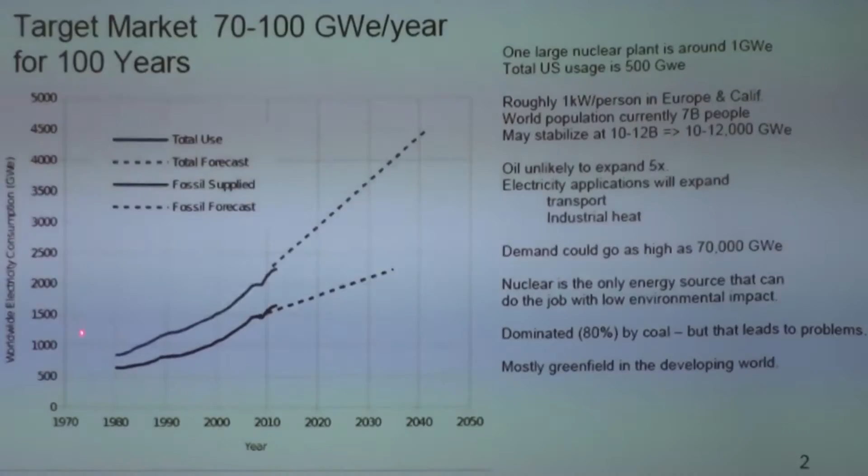Here, this is gigawatts electric. So one large nuclear power plant is roughly a unit of 1. So this is roughly equivalent to how many large nuclear power plants do we need? In Europe and the US, we use about 1 kilowatt per person. In Europe and California. US is a bit higher as a whole. Reasonable efficiency gains, we should be thinking along the lines of 1 kilowatt per person.

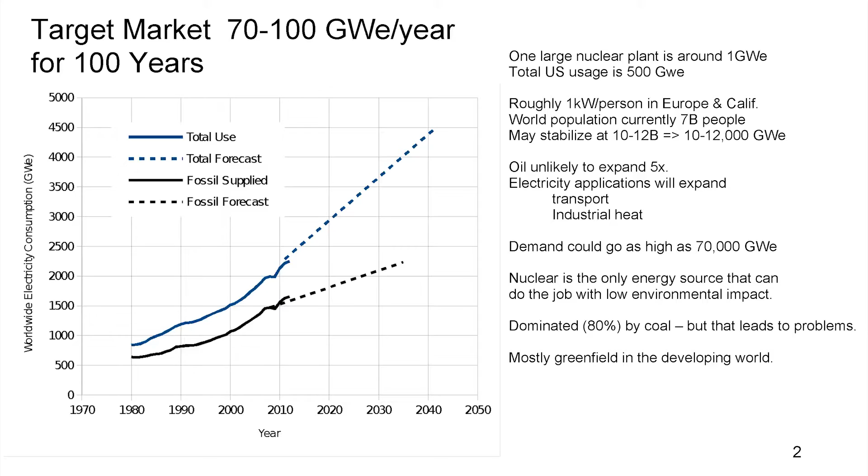Our current population is 7 billion. It's probably going to grow to in the neighborhood of 10 billion before the economies grow big enough that population stabilizes. So we're looking at a market of about 10,000 gigawatts electric. But it could be larger because while we may not be in peak oil, we keep looking harder, we keep finding more, but I don't think anybody honestly expects we're going to find 5 times as much oil as we have.

So transport is going to shift. Likely it's going to shift towards electricity. That's going to drive up our demand and how much total generation we need. Similarly with industrial heat. So there's a lot of reasons to suspect that 10,000 gigawatts is still a pretty low ball estimate, and we might be looking at maybe as high as 70,000 gigawatts electric. This is a huge, huge market, the size of the whole oil industry today.

If you look around to say what could possibly supply this kind of energy, nuclear is the answer. The others simply can't meet that demand. But if we don't change the price of nuclear, we're going to be dominated by coal. And you're going to see 10 times as much coal as we have today. That's what's going to happen unless we can create a nuclear that's cheaper.

The good news, though, is that most of this nuclear is going into greenfield deployments. It's going to people in the world that don't have electricity yet. So we've got kind of a level playing field of brand new coal versus brand new nuclear. That's a lot easier battle to win than an existing coal plant and I want you to shut it down, I'm going to replace it with a nuclear plant. That's a hard economic argument to win.

To successfully compete against coal, we need something that can scale up to a very high volume, on the order of 100 gigawatt per year installation. Not 2 or 3, but around 100 gigawatts per year, or you're not seriously competing with coal. That sounds scary. I mean, it's a lot bigger than we've known how to do so far, but this is roughly what we're doing for wide-body aircraft. Between Boeing and Airbus, they've already produced 100 wide-body airplanes this year. So it's on that kind of manufacturing scale. It's not really out of sight.

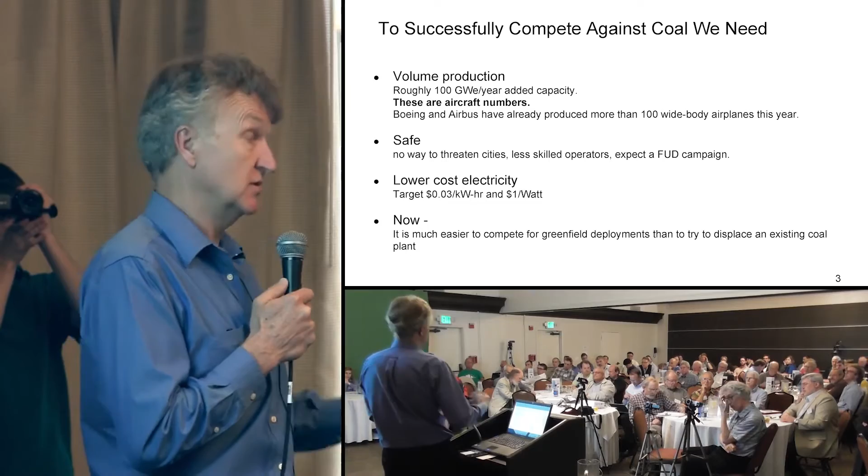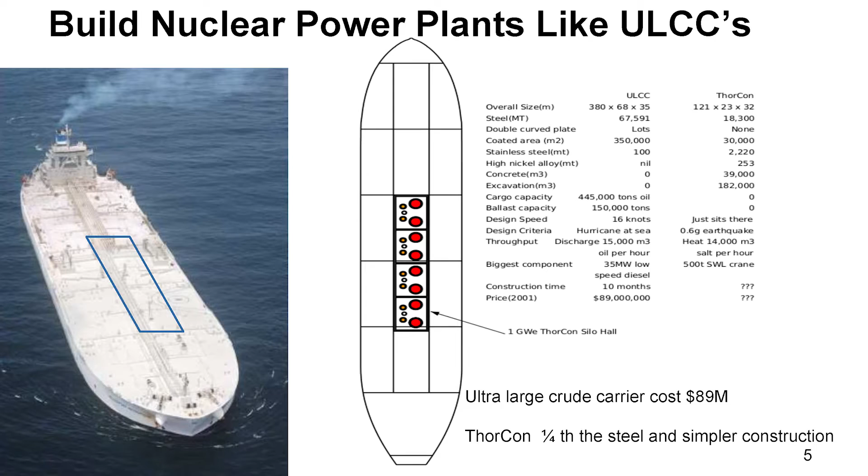So to go into more detail on the volume production end, this picture is a picture of an ultra-large crude carrier. It's one of the world's largest ships. It was actually designed and built by the founder of our company. This blue box here is a 1 gigawatt power plant, drawn so that you can see it head on. This is a 1 gigawatt nuclear island of a power plant, not the turbines and the generators and the cooling towers and stuff, but the nuclear island.

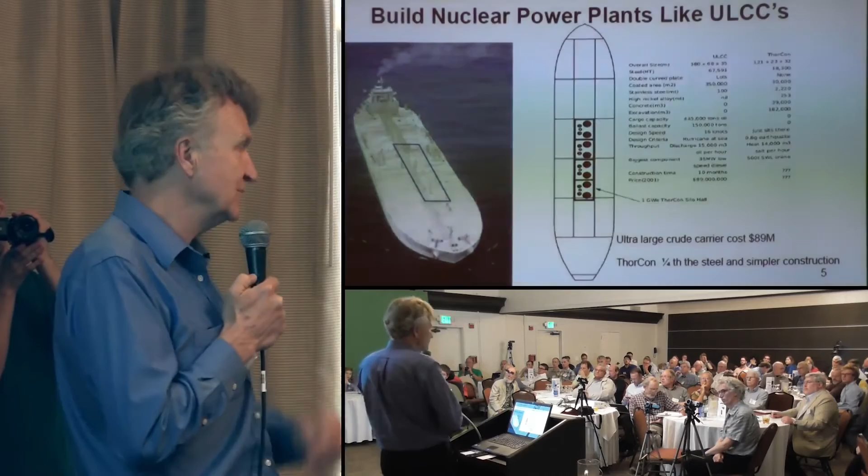And it's small compared to the boat. It's like 1/4 of the steel. And similarly for virtually all the other numbers here, which are too much to go through. But it's simpler to build and 1/4 the steel. This boat cost $90 million. So if I can build a 1 gigawatt power plant for anything remotely resembling how much it cost us to build that ship, then we're doing very much better than with current technology.

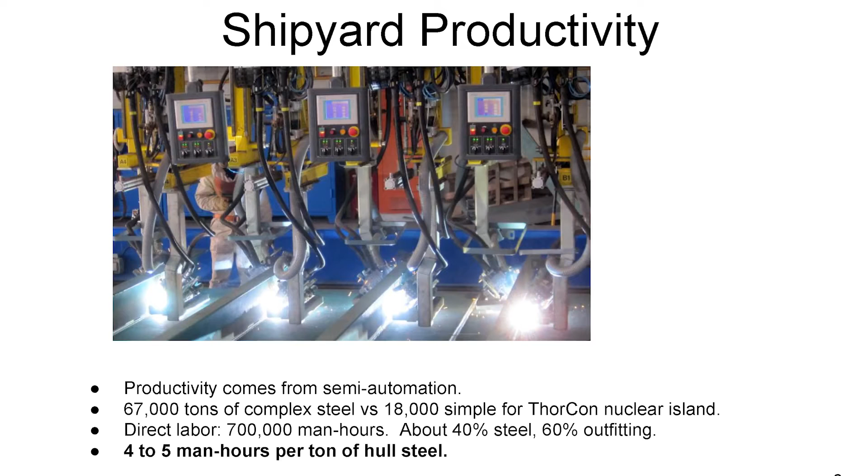The reason that it costs so little for that boat compared to how big it is, is that they have shipyards that run things in production. This is for a double-hulled ship. You've got a plate of steel on the bottom, you've got ribs going across here, you've got robot welders that are welding the ribs to the plate of steel, and you've got one person there running 5 or 6 different machines simultaneously. And then they flip it over and they do the other side, so you make this double-hulled construction.

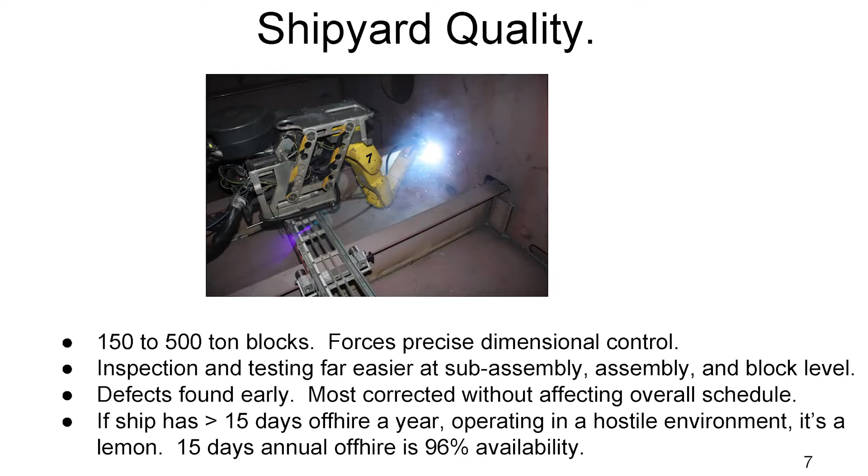We're building the power plants using the same basic technology, actually in the same yards. So our power plant basically is a boat dug into the ground with double-hull steel and concrete poured between the steel. One nice effect of that is that you get very high quality control. You get a lot more uniformity, a lot tighter quality control.

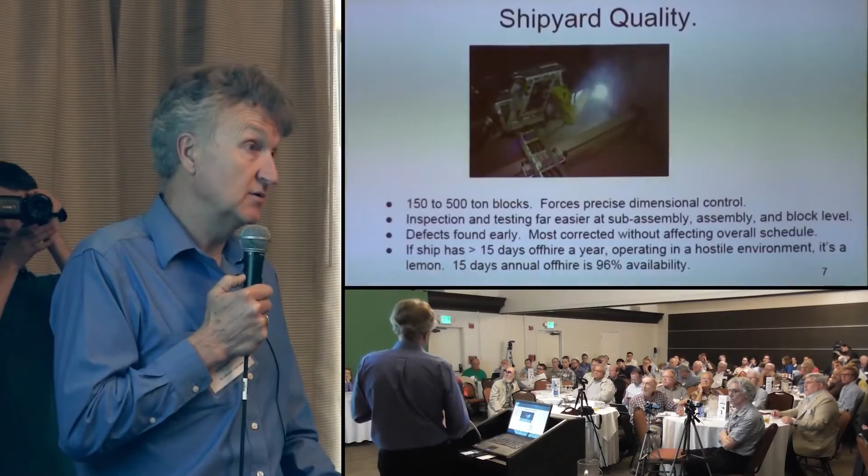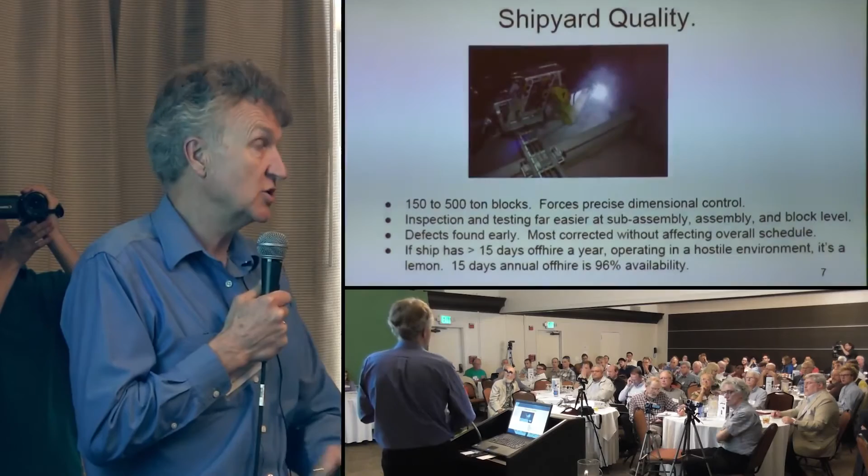We do these in blocks that are 150 to 500 tons, and the blocks have to align in the field very precisely, and then they're welded together. We do the measurements, and they're quite accurate on those measurements. They have to compensate for how much 2-inch thick steel sags when it's set on end. We can do the full inspection on the production line, and if there's any defects, you can reject the block, do the modifications on the production line. You don't have to do this work in the field.

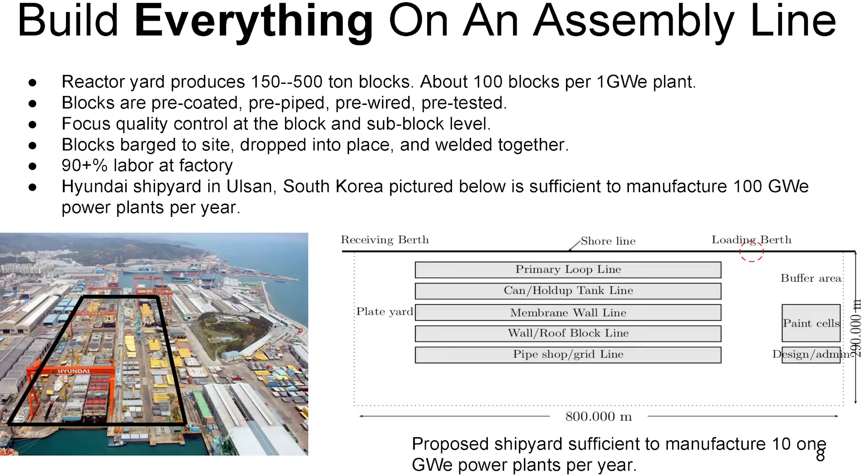So our goal is to get like 90% of the work done at the production line and leave only 10% for the field. A 1 gigawatt power plant is about 100 of these blocks. So they're pre-coated, pre-piped, pre-wired, everything is all finished in them, and they're ready to basically plug like Lego blocks to the adjacent blocks. Once the blocks are all ready, in a normal ship, they would be built in the dry dock at the shipyard. In our case, we're going to put them on a barge and carry them out to the nuclear power plant site.

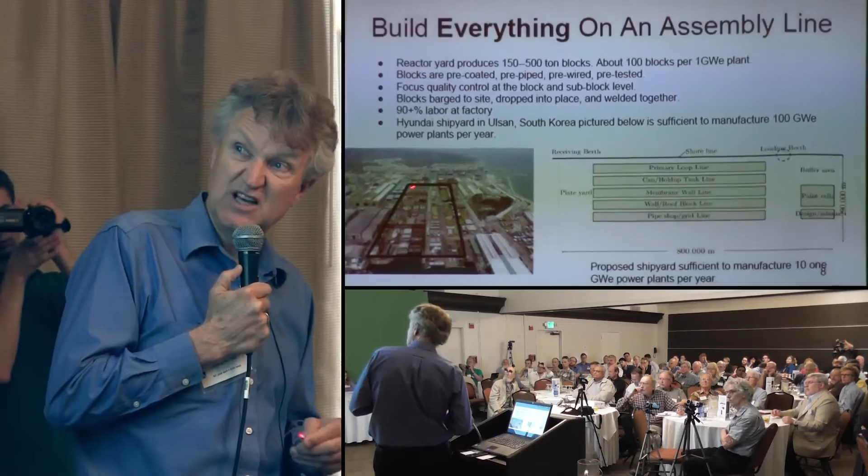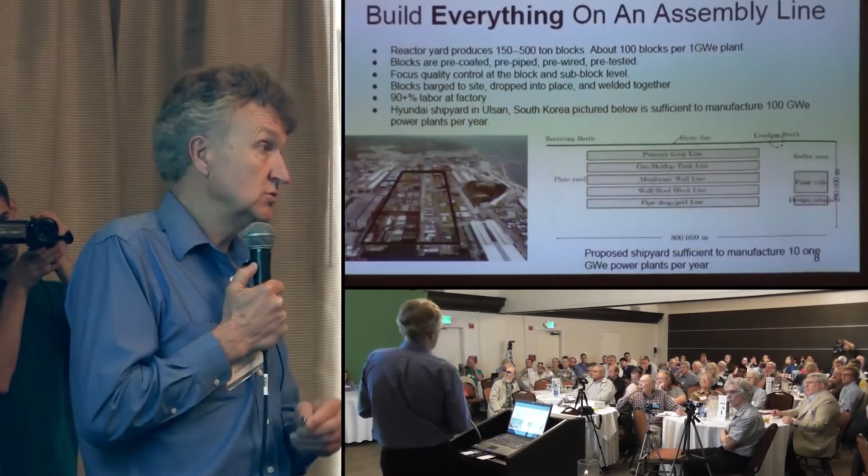This picture here is of a shipyard in Korea, run by Hyundai. This is actually the world's largest shipyard. The highlighted area is the area we would need to build a 10 gigawatt per year power plant factory. And this gives you actual dimensions on it. If we took up this whole shipyard, we would be able to produce 100 gigawatts per year. So the concept of being able to build power plants at 100 gigawatts per year is very, very much viable.

And once we get away from the thick forgings of the reactor vessel that you have with light water reactors, the block size is limited by the transport. We would love to build the whole power plant in one big block. It gets to be a little awkward to carry around.

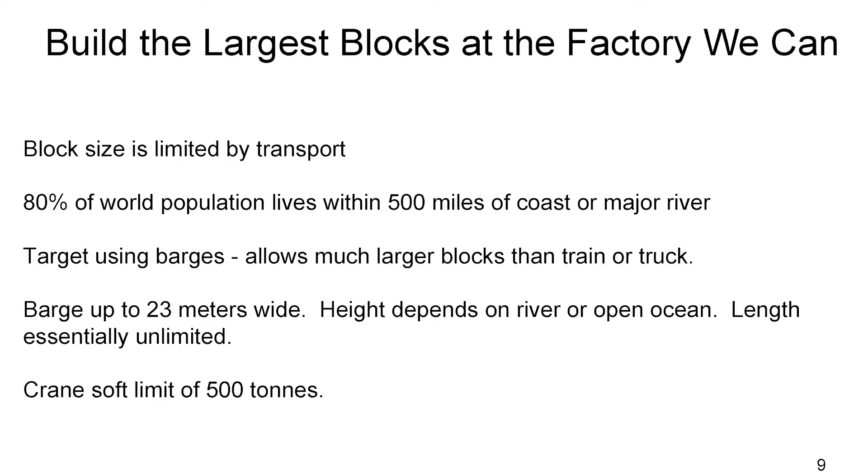What we notice is that about 80% of the world's population lives within 500 miles of a coast or a major river. So we're planning to use barges for our transport, which makes it so that we can transport these 500-ton blocks. They can be much larger than you can fit on a truck or a train. And that makes it so that we can do more of the work at the factory, do more of the inspections at the factory. So the barges are up to 23 meters wide. That's set by a lot of the rivers and the locks in the river systems.

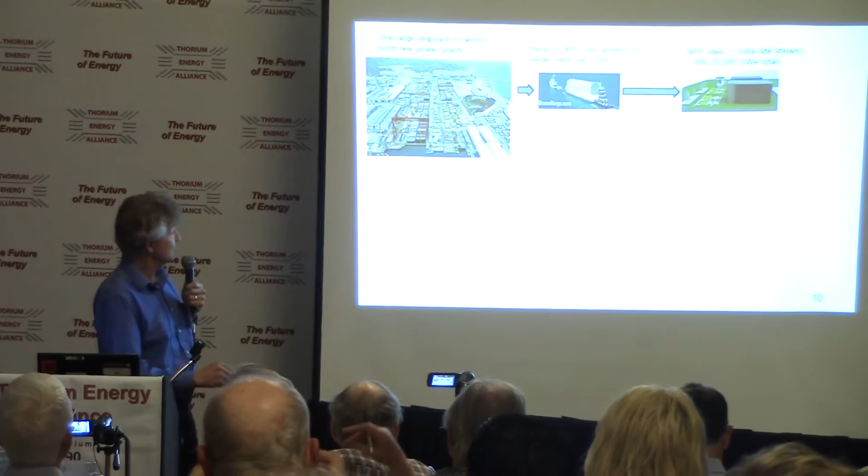500 tons is our current design limit, but that's set by crane sizes, and there are larger cranes, so we're going to be doing some economic trade-offs of whether we should go to larger blocks still or not. So the concept is you have a factory that puts things onto a barge. Takes us about 20 barge loads to deploy a 1 gigawatt power plant, so that's what this is.

And once you've done that, then every 4 years we exchange our cans, because we have a graphite moderated reactor, and so the graphite is going to get neutron damaged. We have to replace it. And we do that by having sealed cans that we put on a can ship, we call it, a specially designed ship, that will haul those back to a can recycling center, which basically looks like another shipyard that services about 50 gigawatts electric.

And we take the cans in, clean them, inspect them, make sure they're still good to go, ship them back out, or in some cases, like with the graphite, we take the old out and put the new in. After we've been doing that for a decade or so, we're going to have some spent fuel, and that will go to a fuel recycling center.

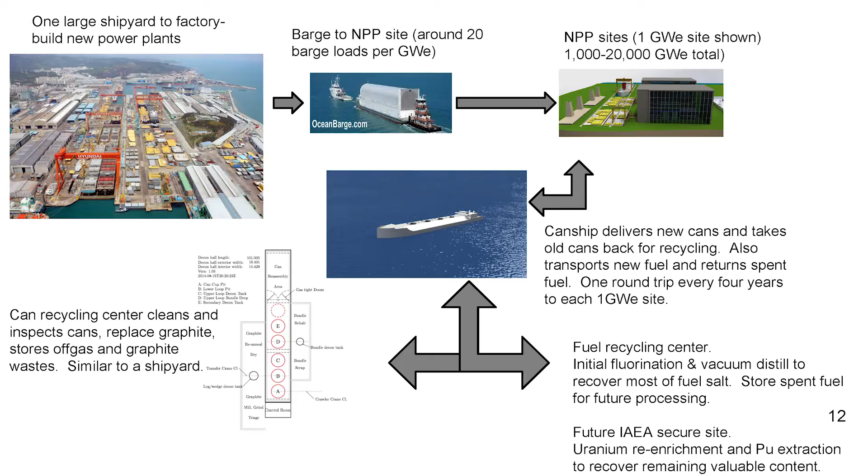We'll start out with just using simple fluorination and distillation to recover most of the salt. That'll let us recover the salt and the uranium and the thorium. It does not let us recover the transuranics. In the future, we would anticipate making this a secure site and being able to do re-enrichment and to do the transuranic extractions. Power plants are quite content to eat all of their own transuranics, so that our waste flow as far as the plutonium and curium and americium is set by how much leaks through your chemical extraction process.

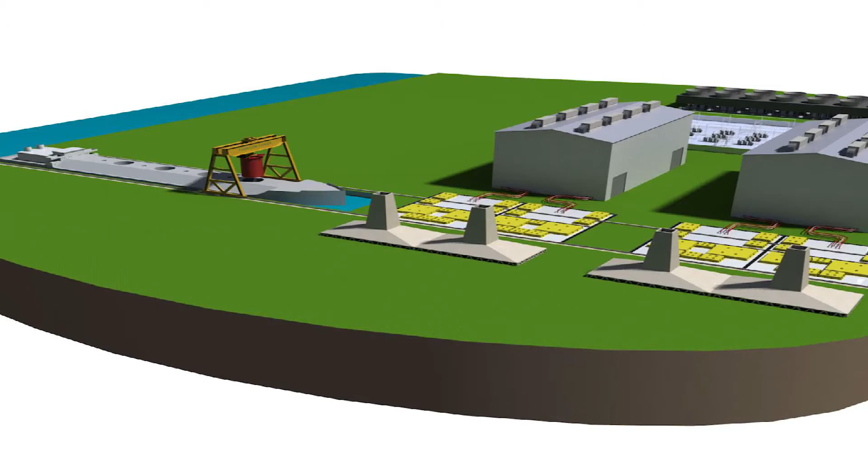We have to be safe. This is a 1 gigawatt power plant site. You see the can ship here. You see this little red one is a can. That's a 250 megawatt electric reactor. We have a crane that moves along on rails, so a gantry crane that picks it up and takes it over. These yellow hatches here are the doors to our reactor. So our reactor is completely underground, and you access it directly from above. So you take off the trap door, and then you lower the reactor down into it.

These closed towers here are the decay heat cooling towers. So we have fully passive decay heat removal. And then this is a standard turbine generator. We use standard steam cycle turbine generators until other people spend the money to invent the Brayton cycles. We have no objection to Brayton cycle, but we don't want to wait. I can buy the steam cycles today, and I want now. Then behind that is a switchyard and forced draft cooling. But I'm sure we're going to end up having to support several different cooling styles depending on the site.

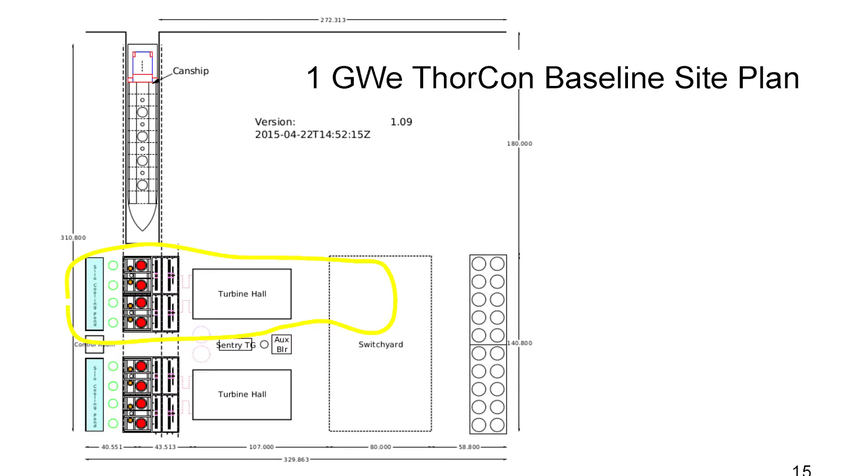So this just gives you some of the dimensions in meters of the different areas. Optimum turbine generator set is about a 600 megawatt turbine generator. They make them larger, but they don't get any cheaper per megawatt, so we get better modularity by going about 600. They make them smaller, but they get more expensive. So we're sticking around the 600 megawatt. We have 250 megawatt blocks, so it takes 2 of those to drive it, and these little red lines here are the steam lines that are going off to the turbine generator building.

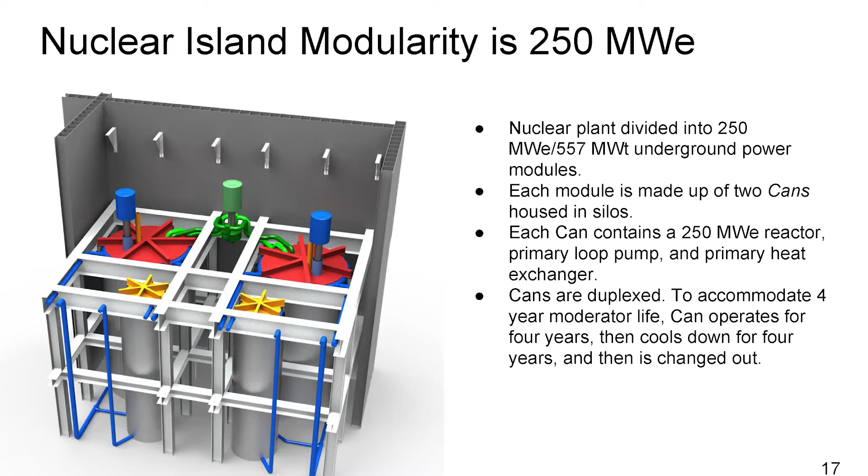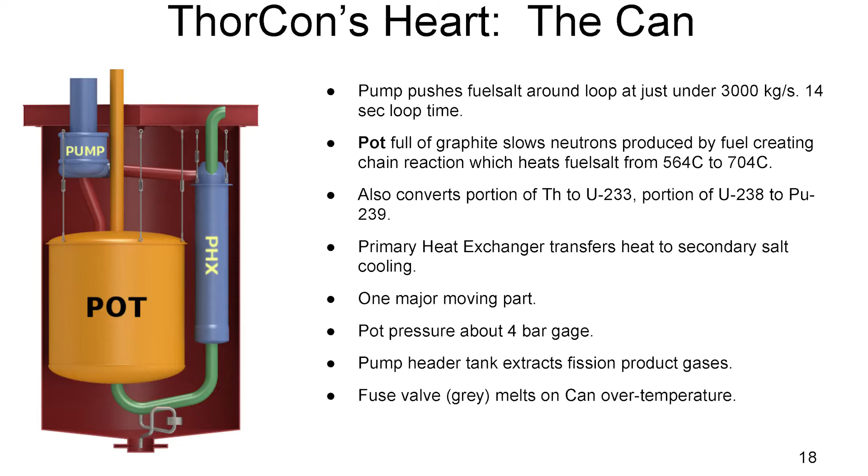The nuclear island itself is 250 megawatts. We have 2 cans, so we're duplexed. So one can is operating while the other can has spent fuel in it and is cooling down, letting things cool down before we transport it over the ocean. So what we're transporting is on the order of 4 years old. Okay, each can contains the primary loop pump, the primary heat exchanger, and the reactor vessel itself. And so all of our radioactivity is really contained within the can. We ship a sealed can out, we take a sealed can back.

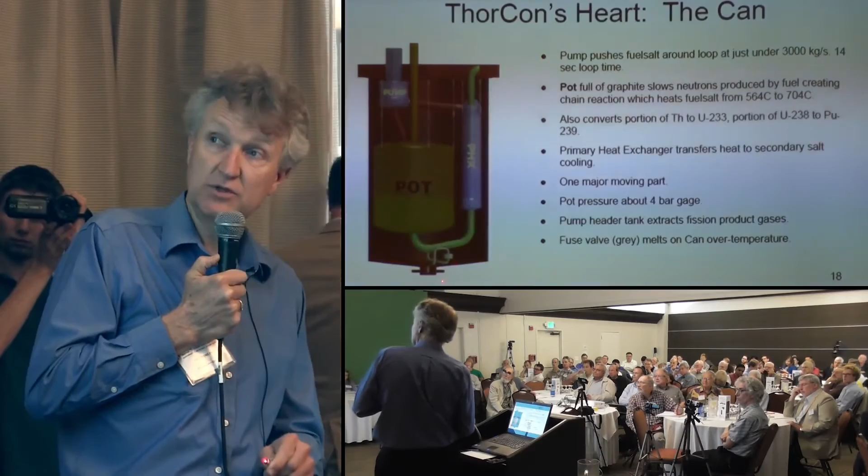Inside the can, you've got the reactor vessel called the pot. We've got the pump and the primary heat exchanger, and those go around in a loop. You get secondary salt coming in and going out. And we have the fuse valve here at the bottom. And this will go off to a fuel dump tank, which we'll talk about in a minute.

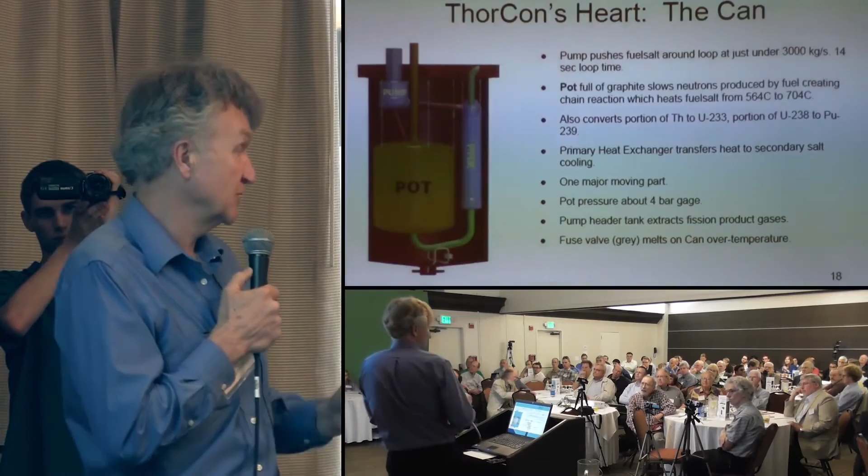Everything is hung from the ceiling of the can to accommodate thermal expansion. That turns out to be a reasonably challenging engineering problem - how do you deal with how things change shape as they go from room temperature up to 700 C? So we've done that by hanging everything from the roof and letting the cables adjust to let the parts move apart from each other and squeeze together with temperature.

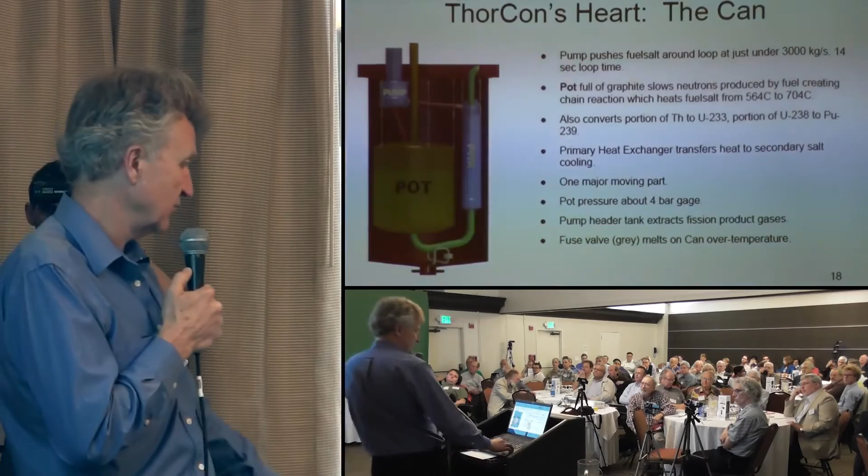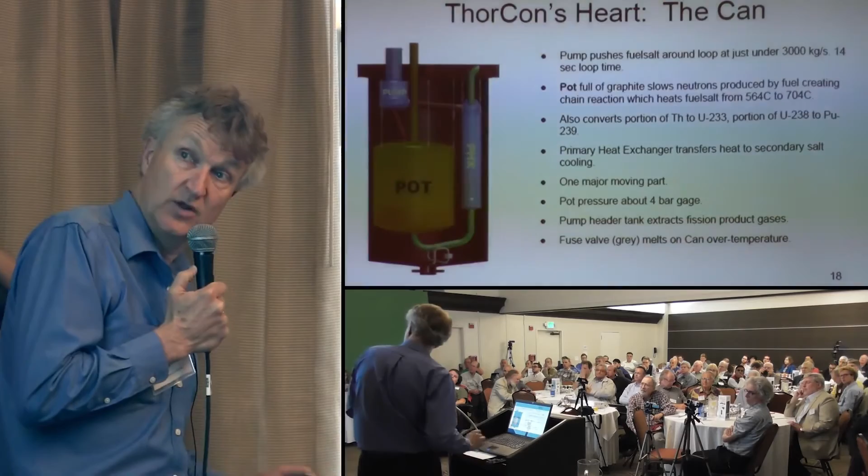The pump is moving about 1 cubic meter, about 3,000 kilograms per second, and it's about 14 seconds to go around the loop. You only have one major moving part, that's the impeller for the pump, and the pressure is modest. The pot itself is around 4 atmospheres. The highest pressure in the loop is 12 atmospheres. So we're dealing with very modest pressures here.

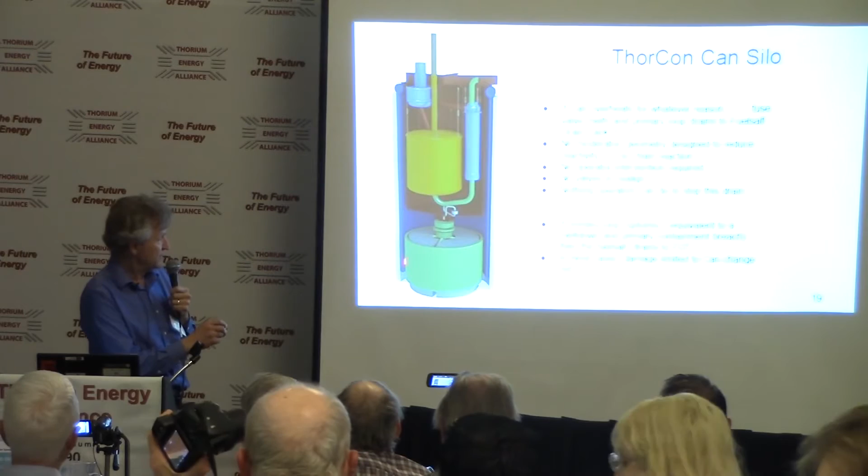At the bottom, below the can, we have what we call a fuel dump tank - that's just the green part. It's a donut-shaped vessel that will hold all the fuel salt. Because it's donut-shaped, it's very poor for neutronics. Because we can move the fuel, we move it there, and it's in exactly the wrong shape for good neutronics.

So the reactivity down there is very low, and if gravity works, anything that overheats will cause something to melt - preferably the fuse valve, but if that fails, then a pipe will melt, and the fuel salt will fall down into this donut where it is not going to fission. Guaranteed. No chance, no discussion about possible re-criticality. That just isn't possible to happen.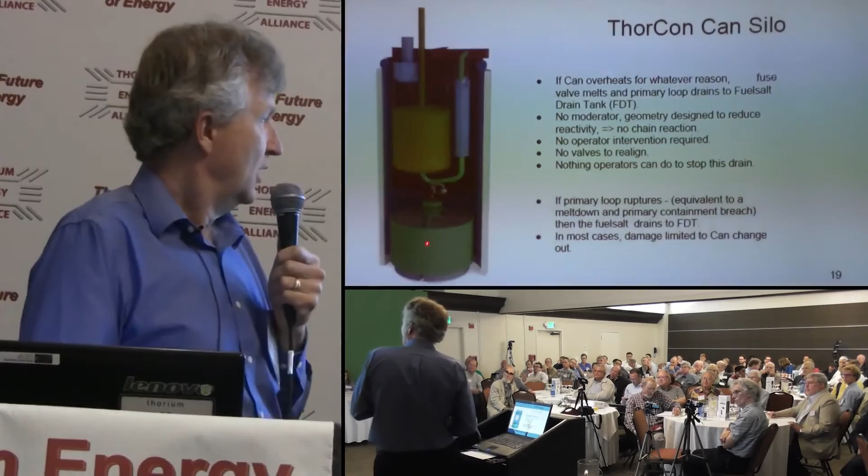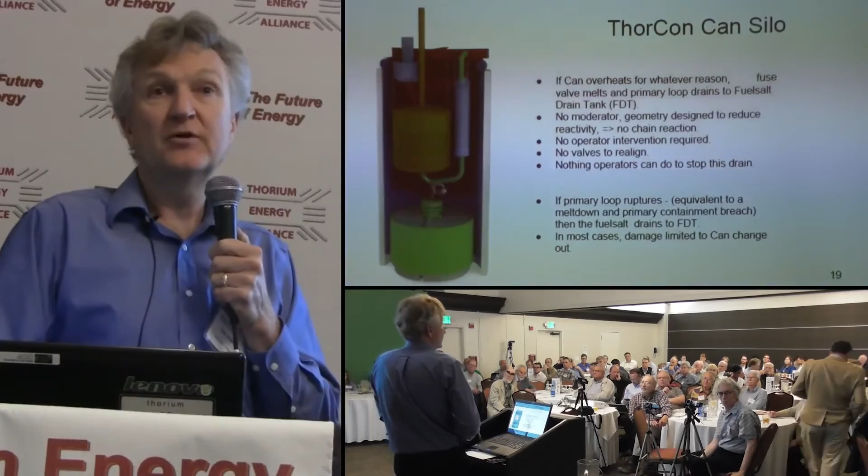I should say also that the fuse valve and the emergency drain here is something the operator can't prevent. If the Prime Minister calls and says no, you're not allowed to open the valve, the operator just says, I can't stop it. There's no valve he can possibly fail to open. There's no valve he can accidentally leave closed and cause trouble with, like we had with Three Mile Island. So the safety here is not operator dependent or Prime Minister dependent.

The next safety feature is what we call the membrane wall. These are vertical pipes, this dark blue here, that surround the can and the fuel dump tank, and they're filled with water. Heat radiates from the can to the pipes. If the pipe gets over 100 degrees C, it changes to steam, and that wants to float. That creates a natural circulation - it's a very strong pump. So we have radiation going from here to there that will keep the can temperature at around 270 C.

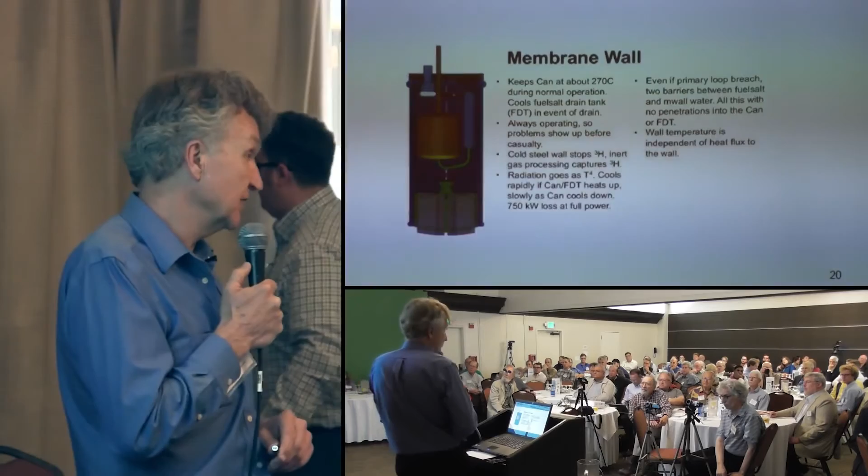Likewise, if you get down to the fuel dump tank, if we have heat generated down here, then it'll pump up from here. So the decay heat removal is there all the time - it's operating all the time. If something should happen, if some earthquake squeezed a pipe or something that blocked it, we will know because we see it in the flow during normal operation. We don't have to wait for the tsunami to hit to discover we have a problem. So we have it continuously being tested, continuously running, and the operator has no valve, nothing he can do to stop it.

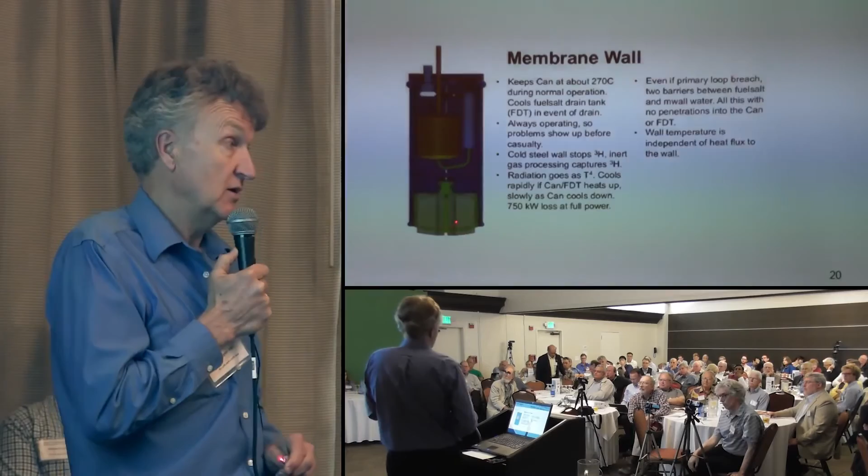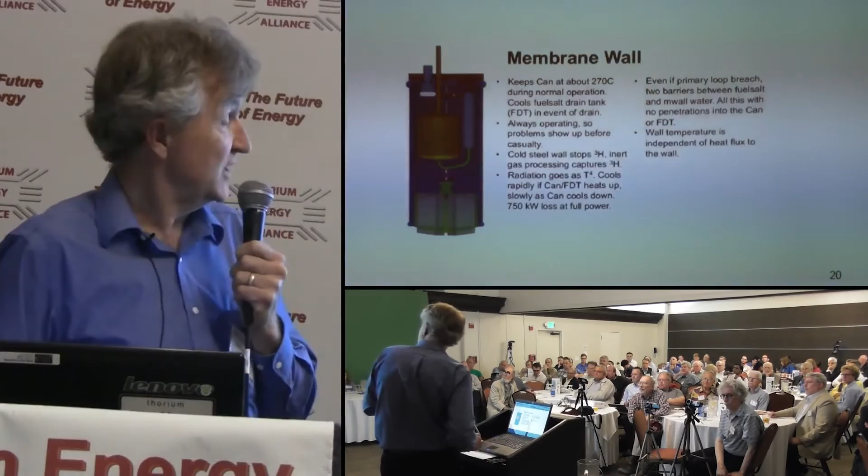It also doesn't penetrate any of the radioactivity area, so this is done purely by radiation - no bayonets or anything probing down into the fuel dump tank. We've tested this in software up to 30 megawatts of decay heat power, and the peak decay heat we actually see is 5 megawatts, so we have a lot of margin on that.

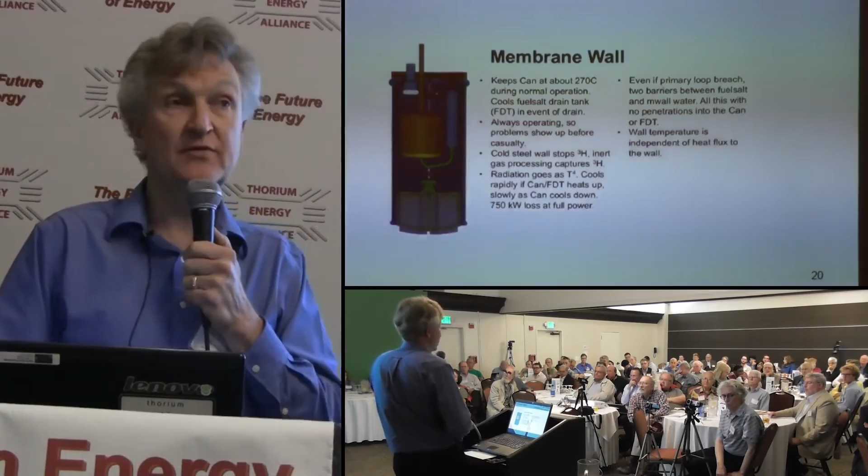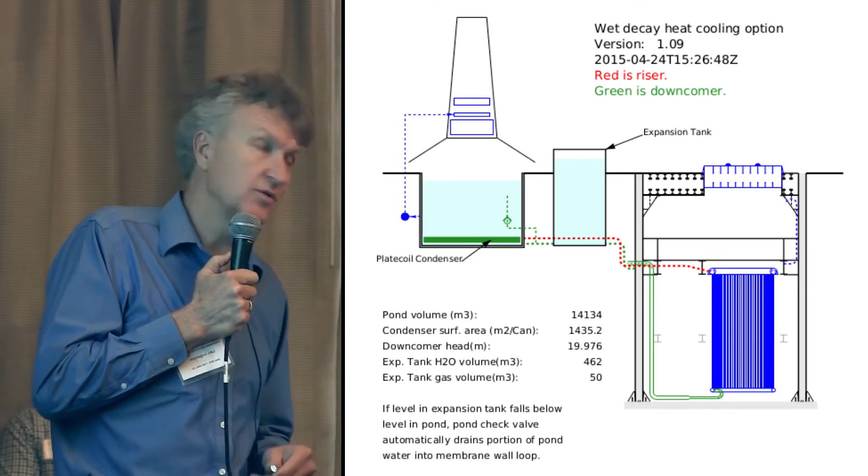If for some reason you're not allowed to put a chimney up, then it's still 72 days worth. So we have plenty of decay heat removal, and this is atmospheric pressure water, so it's very easy to replenish the water if you have any need to.

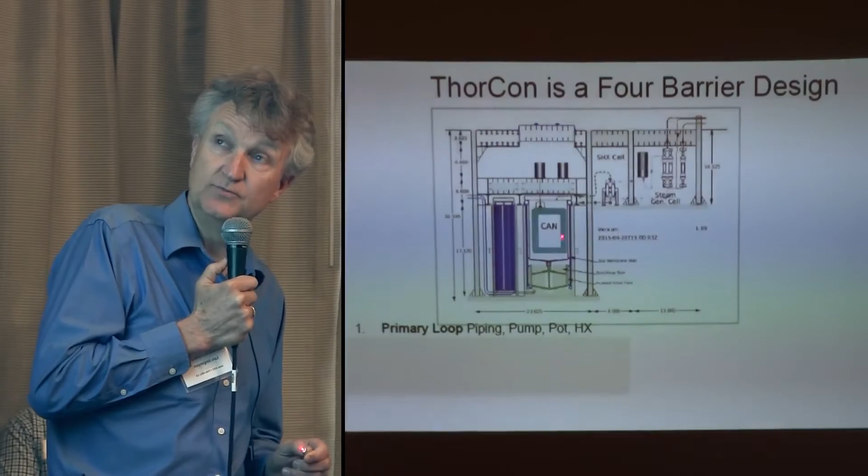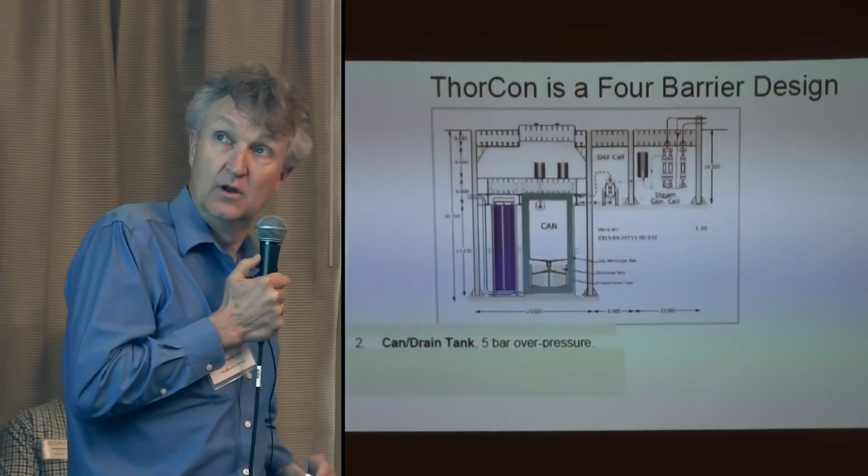Besides decay removal, we have multiple barriers to removal of the radiation. The radiation is inside a primary loop, the pump, the pot, the pipe. So it's inside here. That is all inside of the can and the fuel drain tank. So that's the second barrier.

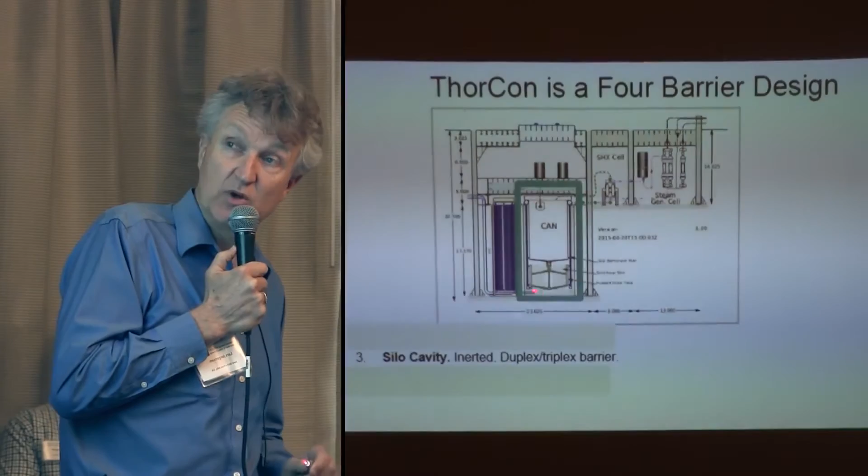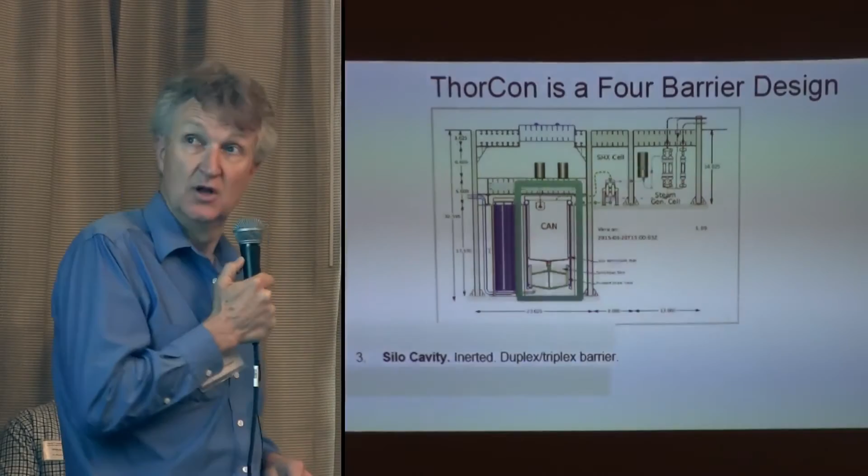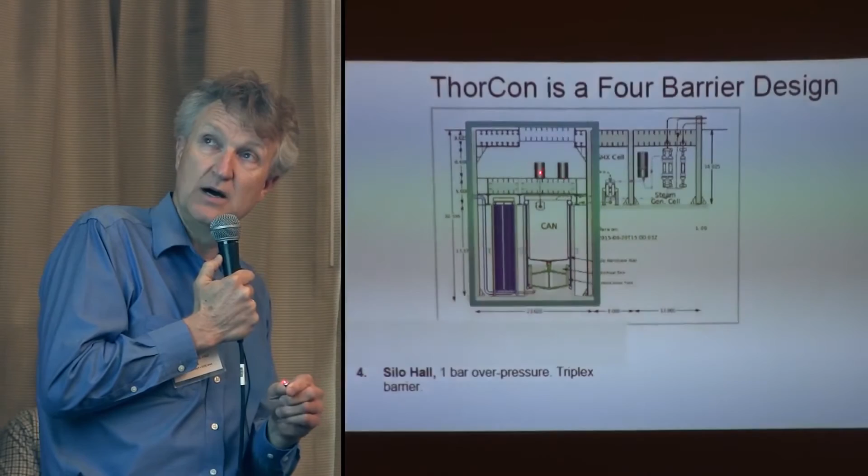The can and drain tank is in something we call a silo, which is a concrete structure, basically a concrete steel cylinder that's also gas tight. And then that whole thing is inside of what we call the silo hall, which includes the motors and the hatch to the outside world. So this is where you finally get to the outside world, and this is all ground underneath.

So we have 4 barriers to getting any kind of radioactive release, and at least 1 barrier between adjacent modules. So if you did have one module that goes out, it's very unlikely to contaminate the adjacent modules.

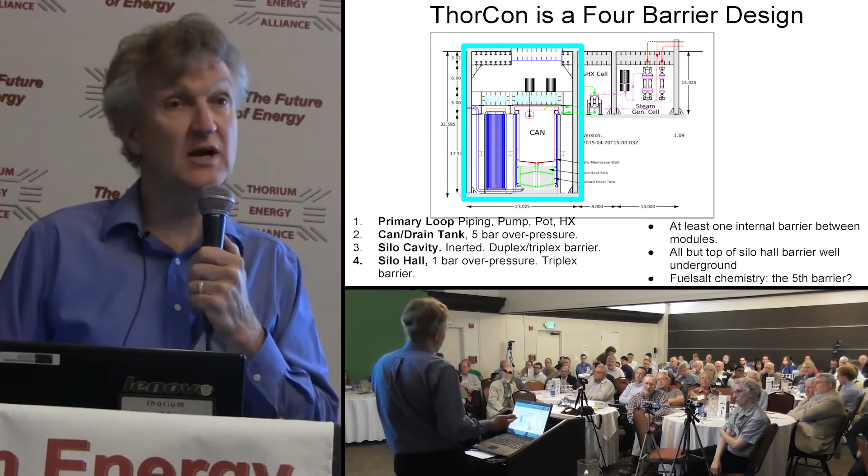We actually, in many ways, have a 5th barrier in that the fluoride salt itself is a very good barrier, in that the dangerous nuclides or elements would be your cesium, your strontium, and your iodine. And the cesium and strontium form pretty tight fluorides that don't want to go anywhere. In fact, figuring out how to get the strontium out is a fair challenge. It doesn't even boil until like 2500 C or something ridiculous.

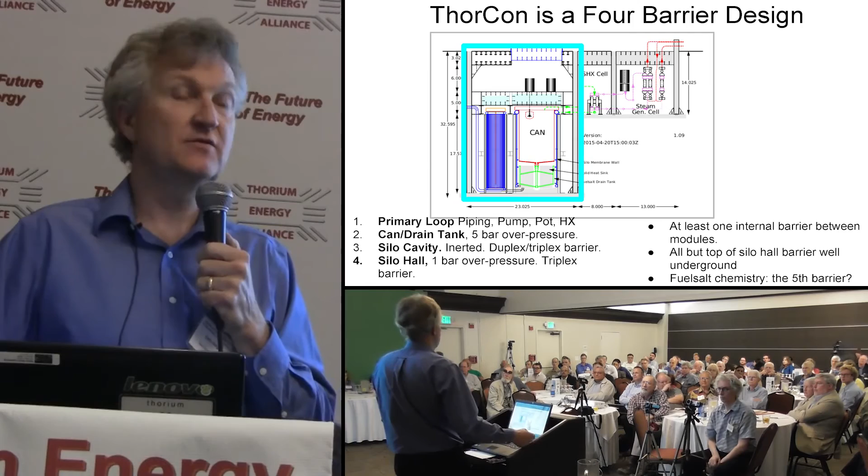So even if somebody sent, say, a bunker buster missile in and went blasting through all of the barriers, you create a spill—it's a spilled salt that solidifies on the floor. It's not something that wants to go into the atmosphere in the first place.

Just a quick word on the neutronics. I'll keep this real short. The core is made up of logs.

The logs are made up of planks, and all of that is graphite. If you're familiar with the Ebasco design, that was a spin-off from MSRE when they were looking at MSBR—it's based on that. We've made an accurate 3D model of the pot and run that both through MCNP and Serpent, and get consistent results through them.

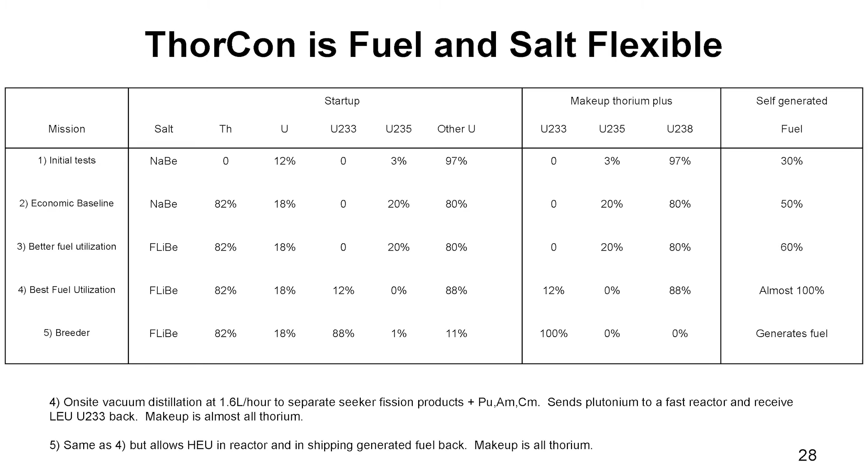So we're pretty confident on that, and we've actually extended the model to include a fair portion of the power plant beyond the reactor vessel itself, so we can see things about radiolysis of the membrane wall water and other questions like that. We're able to handle fairly flexibly what kind of fuel and salt in the same reactor.

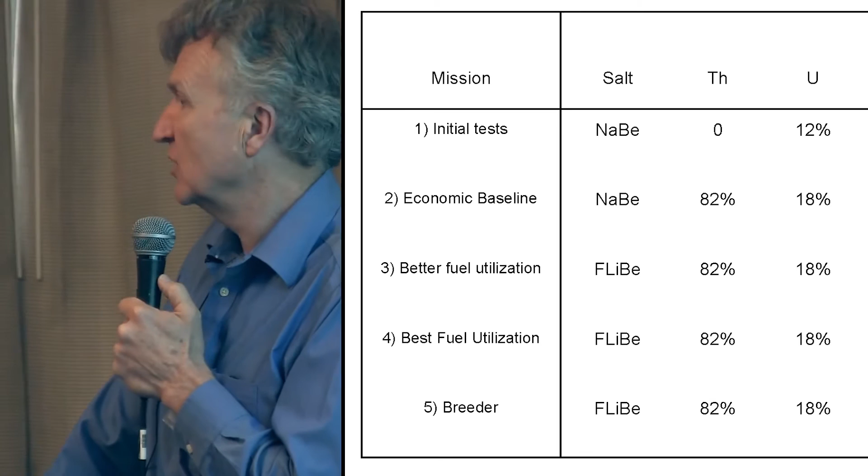We're currently planning on using NaBe, sodium fluoride beryllium fluoride, as our baseline salt because we can buy it now. Flibe is a little harder to get by, and we don't want our schedule to be dependent on when we can buy Flibe. So we make the economics work with NaBe. When Flibe comes along, we can switch to it.

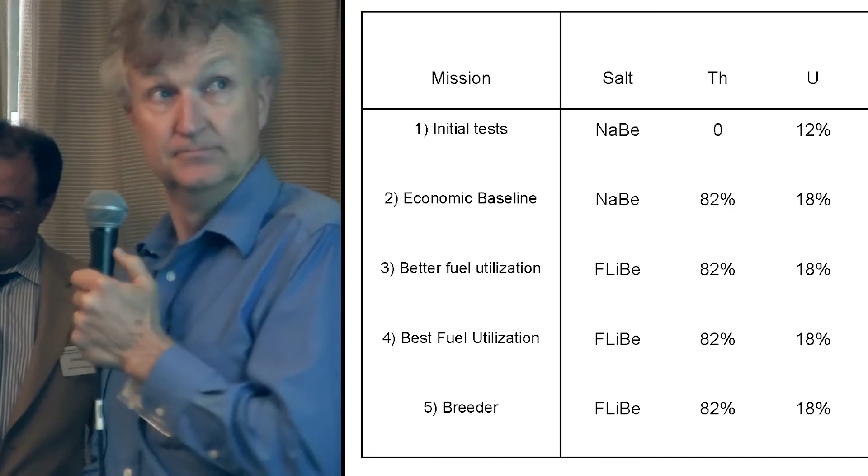Likewise, what enrichment we can start with depends on time. So early on, we're thinking we might be stuck with 3% or 5% uranium, and then later on, we'll be able to switch up to 20% and get better efficiency, better economics. But it just changes the economics by less than a penny per kilowatt. So it's not a super critical thing.

Going to derail for a second and talk about should cost versus did cost. Should cost would be, if we set up a manufacturing line, how much does it take based on putting in the materials and the skills we have to put in, the labor we have to put in. Did cost is what happened when you got in with all the regulations. So we're going to focus on what it should cost.

The regulations are going to come in on a country by country basis, and it's going to preclude us from certain countries until they come to their senses.

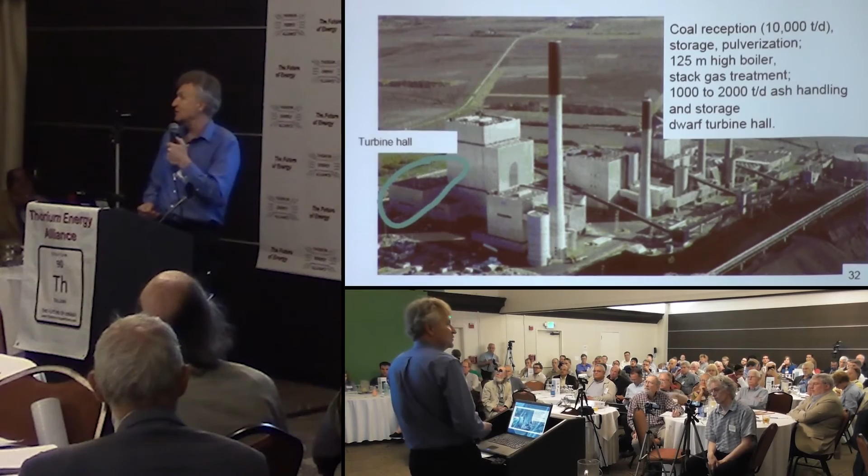And they've got the hard job. They've got the guys that are going to move 10,000 tons a day. They've got the guys that got 10 times as much building as we do. We should be able to beat them, and we can.

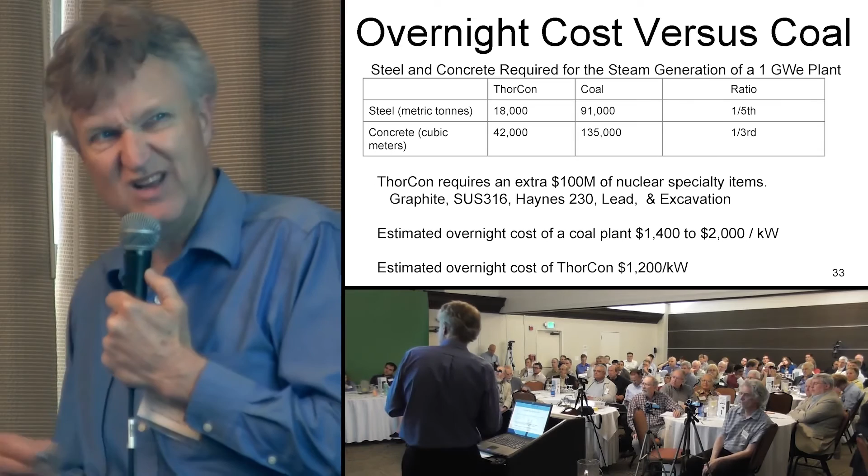So on steel, we got roughly 1/5 the amount of steel as a coal plant does. For concrete, we've got about 1/3 the concrete that the coal plant does. So our materials cost should definitely be significantly lower. We do have some exotic materials, so that adds up to about $100 million per gigawatt.

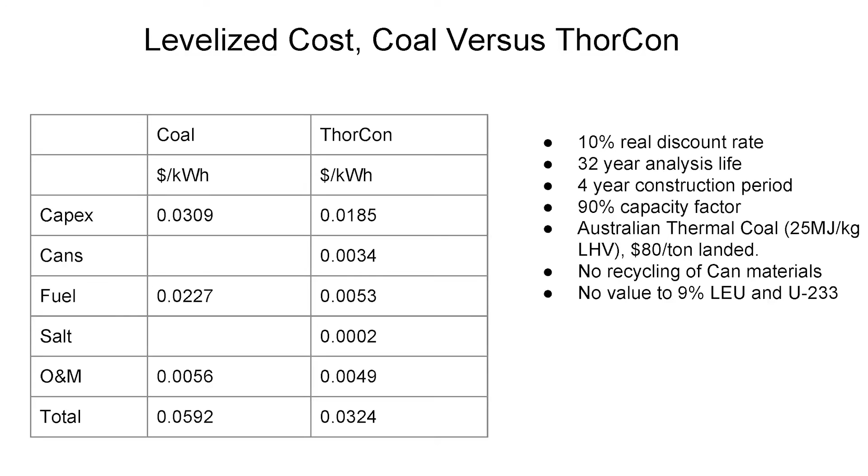So if we get to the levelized costs, I can go through all the details here, but bottom line, talking about roughly 6 cents a kilowatt hour for coal and about 3 cents a kilowatt hour for ThorCon. It's roughly where we think we're at.

The other thing we think is important is if you're going to have 10,000 units deployed, inevitably some of them are going to break. We can't say why, we don't know where, but something's going to break someplace sometime. We want to be sure that's not a significant event. So all the modules are replaceable, and you have hatches on top that let you come in, take the module out, and put a new module in.

That's quite different from existing light water power plants, where they have to deal with very large pressures and a large inventory of water that can turn to steam and has to be contained. Because then you have to cut through the concrete mausoleum to try to get in there to fix things, and that can be quite expensive, and has actually ruined some power plants.

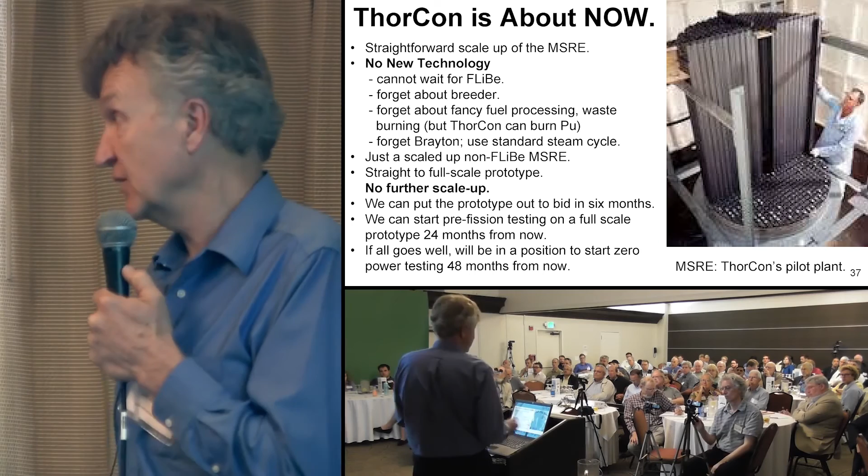And finally, it's about getting it ready now. So we've started with MSRE, and we've made sacrifices in neutronics performance, and somewhat in economic performance, in order to keep the schedule short. We're not depending on when we can get lithium-7—we can do just fine with NaBe. We're not depending on when we can process and extract the plutonium and recycle it; we'll say it'll wait for us. We have some spent fuel, we'll stick it over there in the corner, and when we finally get that process ready, we can go back and clean it up. It's not going anywhere. We're not going to go with the Brayton cycle because it's not here now. We can go buy steam power plants and compete with coal now.

We do plan to build a full-scale prototype. Our prototype will be 250 megawatt electric, and once we've tested it and abused it and made it go through all accident scenarios, we can tell people in the city: no danger is going to happen, because we've tested it, we've actually done it. We'll ruin a power plant in the process of doing that testing, but we'll be able to give people that reassurance, that safety.

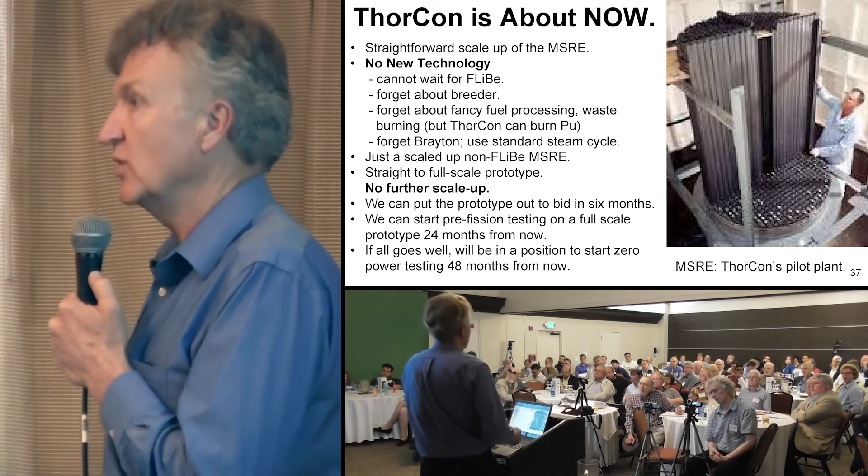We think we can get to pre-fission testing in about 2 years, and to fission testing in about 4 years, based on the speed of technology and how fast we can get the work done. Now, if the regulation system is slower than us, that will extend the period. We have some countries where we think we could just add 1 year to that schedule and work in those countries. The other factor is finance, which I don't have answers for right now.

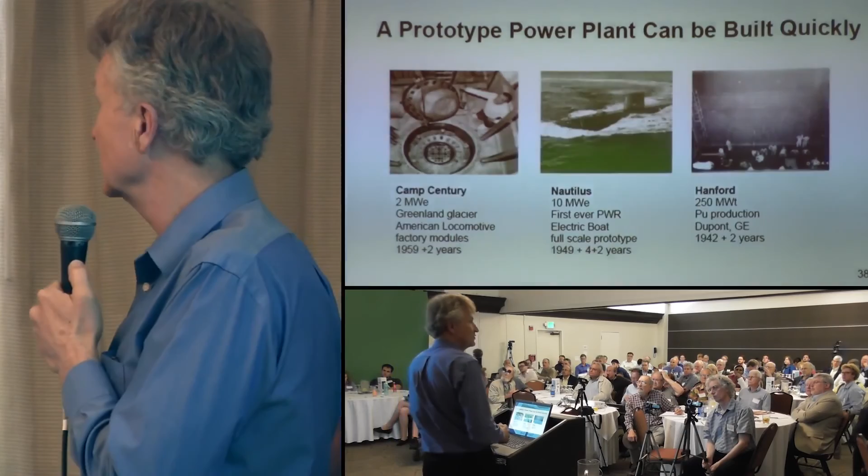That kind of schedule seems kind of crazy to people used to the nuclear industry, but I'd point out that Camp Century was built in 2 years. The Nautilus was built in 6, and that was the very first one and had lots of extra challenges being a submarine and all. Hanford was built in 2 years. By those standards, ours is a rather lax schedule.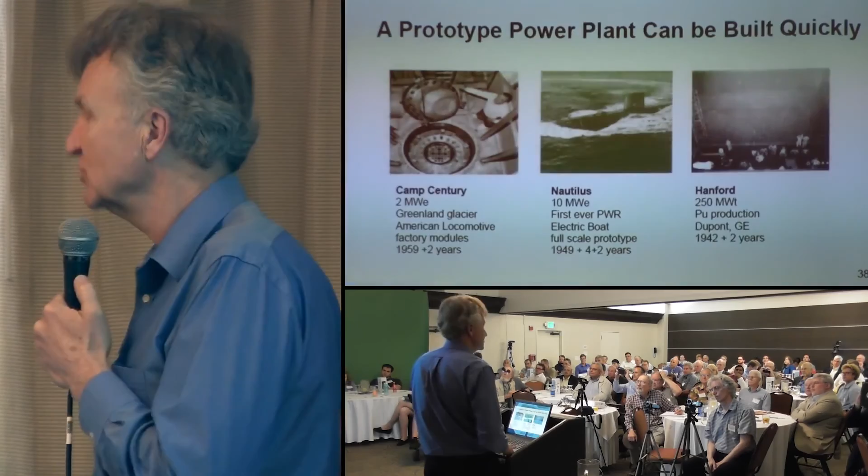With that $8 in the U.S., is that a lot to do with regulation, a very significant cost? A third of it is attributable to regulatory costs. Partially it's also the fact that it's a light water reactor, so most of the construction happens on site, and therefore you don't get the benefits of having an assembly line. Partially it's the very thick concrete structures and lots of rebar that is expensive to build.

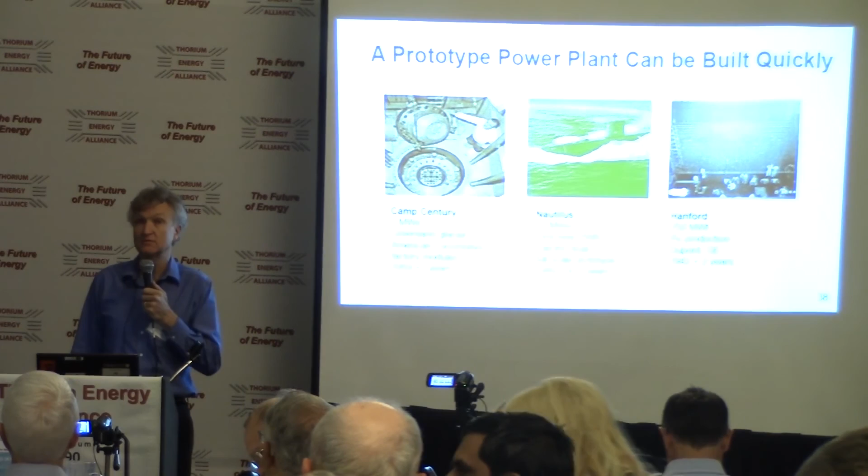How big is your team, and what is it going to take to reach your goals financially? Our team right now is about 6. We're looking at roughly 10 million for the initial design to get through bids and get bids from subcontractors ready. Then about 100 million to get the pre-fission prototype built and tested, and about 700 million to get the fission prototype tested.

How did you make the decision between operating as a company that sells reactors to utilities versus being a company that owns reactors and sells power? I don't think we've made that decision, and I think that will probably be made by the guy that comes up with the $700 million check.